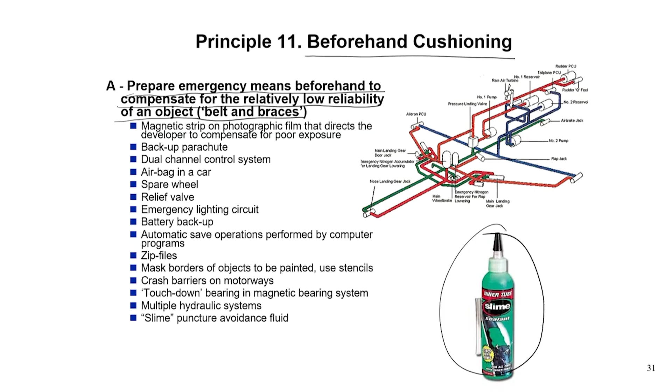Principle 12 is interesting, and it is a little more complex or less common sense than the other principles discussed. Principle 12 is equipotentiality. What does equipotentiality mean? It means you should always prefer to work in a surrounding where there will be least change of potential energy required.

To tell you very simply, you would certainly not like to do some work which involves working on the ground floor, then jumping up to the first floor, coming back to the second floor. It is a much more energy consuming process.

Many of you might have seen how typically a car or a bus is maintained. They will either dig a small hole so that the person who is going to clean up or inspect the chassis can go inside and see the car, or they will have a hydraulic jack system which lifts the entire thing up so they can do the cleaning and everything.

All these things are done in a way so that you can maintain the equipotentiality. If an object has to be raised or lowered, redesign the object's environment so that the need to raise or lower is eliminated as far as possible, or try to do it through environment redesign. A beautiful example is the canal locks.

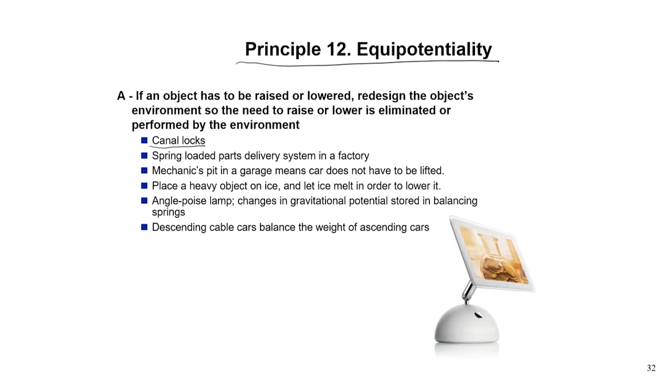Spring loaded parts delivery system in a factory, mechanics pit as I already told you, place a heavy object on ice and let the ice melt in order to lower it, the angle poise lamp where changes in gravitational potential are stored in balancing springs, and descending cable cars that balance the weight of ascending cars, used both for elevators as well as for ropeways. These are all principles of equipotentiality.

Now we come to a principle very much used for solving a design problem when you cannot do it in a forward manner. We call this the principle of the other way round, which has three connotations. The first and most important one means invert the actions used to solve the problem, for example instead of cooling an object, heat it.

To loosen stuck parts, we generally cool the inner part instead of heating the outer part, so that way you can release it. Or in vacuum casting, test a pressure vessel by varying pressure outside rather than inside the vessel, or place nuts in a vacuum to get them out of their shells. So everywhere you actually invert the problem.

Let us say you have two systems that need to move relatively against one another. If the traditional mechanism is to move system A, then you try to hold system A and move system B instead, that is inverting the action. Then make movable parts or the external environment fixed, and fixed parts movable.

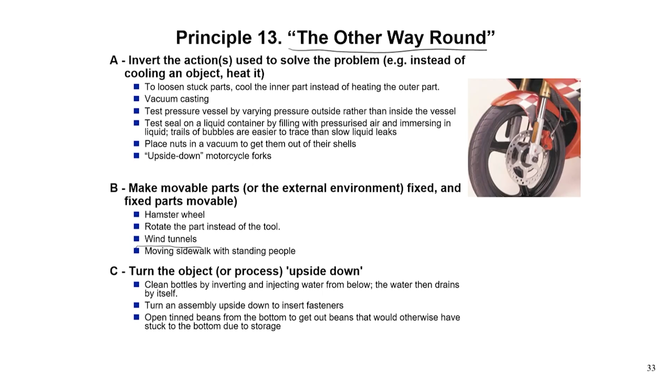Finally, another connotation is to turn the object or process upside down, like cleaning bottles by inverting them and injecting water from below, so the water then drains by itself and you do not have to spend extra energy draining. Or turn an assembly upside down to insert fasteners, or open tinned beans from the bottom to get out beans that would otherwise have stuck to the bottom due to storage. This is not seen in too many applications, but it is a better idea to release items from a packaged system. So this is what the other way round principle is.

Now let us go to the next principle, principle number 14. I talked about this while discussing the stacking of bottles, cold drinks, etc. This principle is all about spheroidality or curvature. Spheroidality is a special type of curvature, but you can think of other curvatures like positive or negative curvature, not always spheroidal, it can be parabolic or hyperbolic. So use of curvature is the key thing in this principle.

Instead of using rectilinear parts, surfaces or forms, use curvilinear ones. Move from flat surfaces to spherical ones, from parts shaped as a cube or parallelepiped to ball shaped structures, for example use arches and domes. For a very long time, even before Christ, the discovery of arches happened in our own country.

In the Indus Valley civilization, people used something called the corbelled arch, placing bricks one ahead of the other to create a curved structure. This was the first phase of creating curvature in construction, which later evolved into nice curved, parabolic structures.

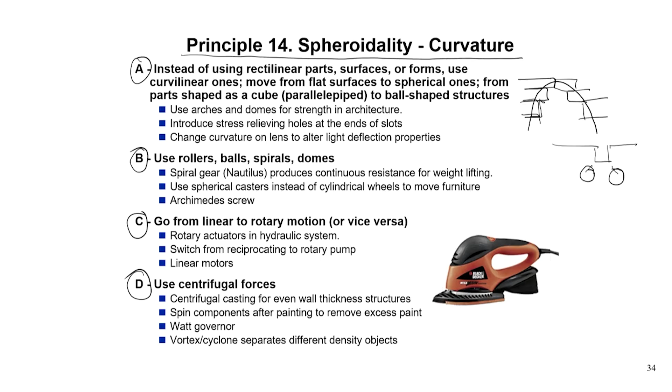And then use of centrifugal forces, which is also related to spheroidality or curvature, because centrifugal forces are generated due to motion in a spherical or circular motion system. That is how principle 14 is used in many different cases.

Principle 15 talks about dynamics, which is a very vast principle with 4 different sub-principles. Principle A in dynamics is to allow or design the characteristics of an object, external environment, or process to change to be optimal, or to find an optimal operating condition. Unless you allow a certain bit of dynamics in the system, you won't be able to set the system in its optimal location.

Similarly, dynamics is used in shape memory alloys or polymers, racing car suspensions, adjustability, and telescopic curtain rails that allow one size to fit all. These are all examples of allowing certain dynamics to happen, by allowing the characteristics of an object to change.

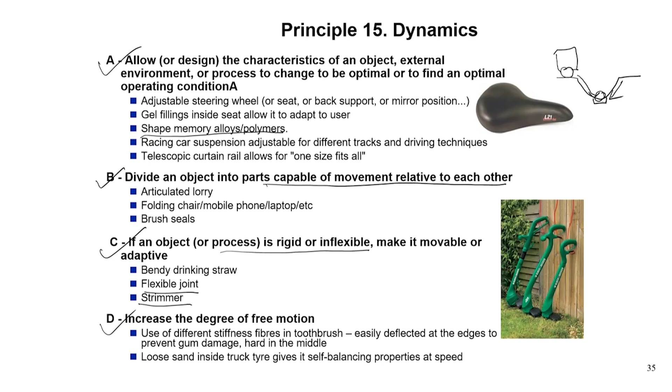Now I come to principle 16, which talks about partial or excessive actions. Many times we say an action will be over once we complete 100% of it, but that should not be the case, as that may take an enormous amount of time. Rather, we should go for 90% or 110%, and for the last part allow some special way of doing it, so that it becomes a much more accurate yet faster way of doing something.

If 100% of an object is hard to achieve using a given solution, then by using slightly less or slightly more of the same method, the problem may be solved much faster. Let me give you one example.

If I draw a circle on the screen, it may not be a perfect circle, but that doesn't matter - I am just trying to tell you about the idea. Now in your eyes it looks like a circle or a curve, but actually there are very small pixels that are drawing this entire system in this way. That means it is neither drawing a full circle, nor a complete straight line, but it is a kind of slightly more or slightly less of the area type of principle.

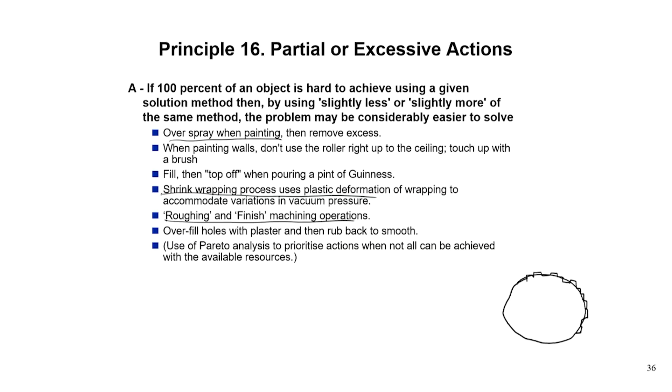This is one way digital systems in computers operate. Similar things you see people adopt when they overspray a painting, because it is much easier to do it and keep some mask. There are other things also, like shrink wrapping process which uses plastic deformation, or roughing and finishing in machining operations - you make a particular cut first and then you finish it up. So the partial or excessive action is taken care of.

Principle 17 is interesting. It focuses on adding another dimension, and that is extremely useful in terms of making a system compact. There are so many examples of it. The first group is that if an object contains or moves in a straight line, consider use of dimensions or movement outside the line, so that you are adding another dimension.

For example, you coil a telephone cable, so that it remains smaller and compact, but whenever needed a person can extend it to a much larger distance. Or curved bristles on a brush - you are adding an extra dimension.

Use a multi-story arrangement of objects instead of a single story arrangement, like a cassette with 6 CDs to increase the music time and variety. Or a multi-story office block - that means instead of growing horizontally, you are adding the third dimension.

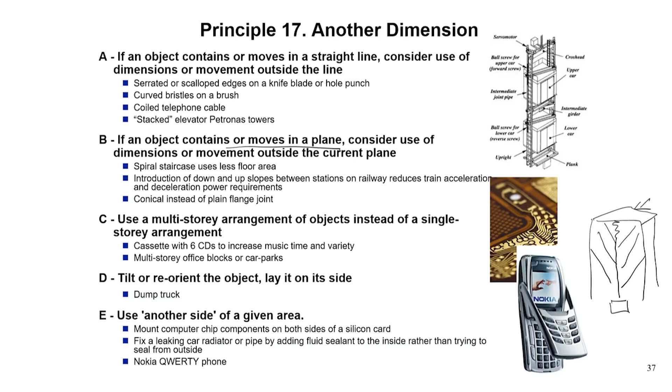We used this in a very interesting example I showed you on the first or second day. I told you we had to develop a kind of linear actuator, and if you remember it had a bipennate actuation system like this, with some spring here supposed to pull some load. What we figured out is that this is a plane, but the other side of the plane is not utilized. So we started adding a similar type of bipennate actuators on the back side as well. That way we could increase the pulling power of the system - we could actually make it double.

Now I come to Principle 18, mechanical vibration. Here we would like to use vibration in order to do some work, like causing an object to oscillate or vibrate. An electric carving knife is based on the principle of vibration, or a hammer drill, or vibration used during the sieving operation - so create an oscillation or vibration.

Suppose the entire thing is already vibrating - you increase its frequency even up to the ultrasonic. Ultrasonic cleaning is one example, or non-destructive crack detection using ultrasonics. Use an object's resonant frequency in order to do some work, like destroying a gallstone or kidney stone, or easing bottle cleaning by pulsing washing action at resonant frequency.

Then use piezoelectric vibrators instead of mechanical ones, so that it becomes an electromechanical system, because piezoelectric materials are like smart materials, for which an electric field change can create a mechanical change, like a change of displacement or change of force.

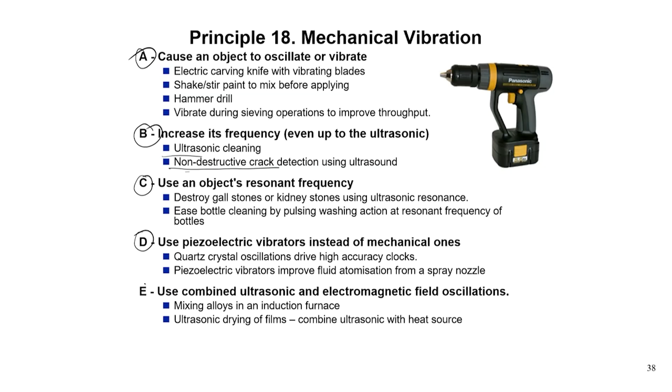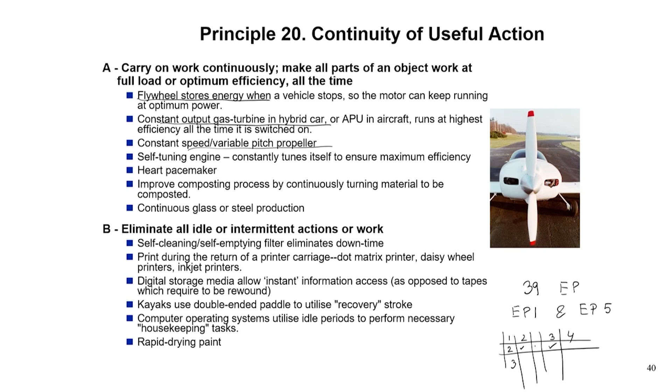If you remember, we had these 39 engineering parameters, the 39 EPs. I told you that for any contradiction, let's say between engineering parameter 1 and engineering parameter 5, you will see a matrix form which will have all the technical parameters on this side, and again the technical parameters on this side, and in this matrix we will talk about the principles utilized for all of them, and that way we will see all the principles we are now going through, and how they are used in solving different technical contradictions.

That is the way we will do it, so let us stay tuned till the next class and the class after that in order to learn TRIZ completely.